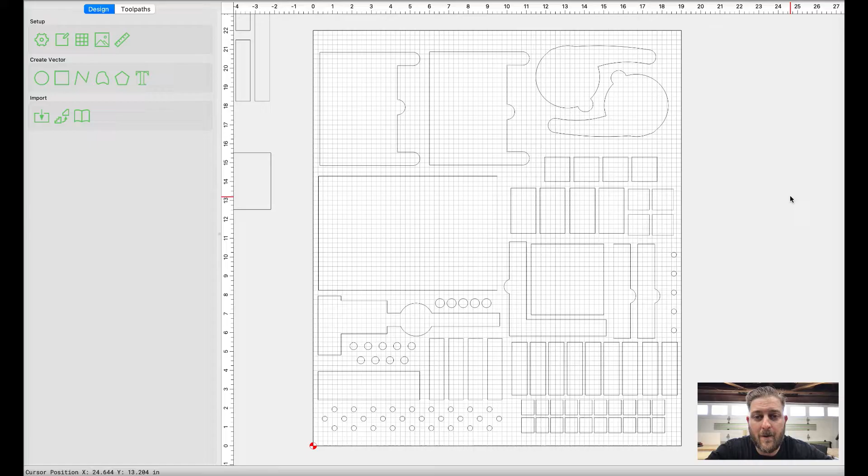Any softwood is going to be good for a beginner because it's going to be really easy on your bits. And if you have any crashes or make any mistakes, it's going to be a lot less likely to break a bit. So here in our example, this included file is going to have a sample tray that I've designed for my Husky tool cart to fit in one of the drawers, but this can be modified any way that you want. But let's go ahead and start with our first thing.

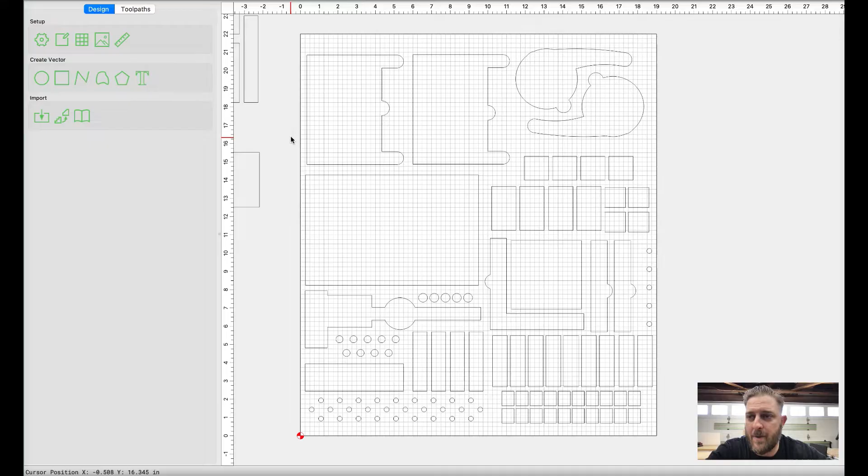It's this setup wheel here, our job setup. We're going to click on that and we're going to type in our stock size. In my case, I'm using a piece that's 19 inches by 22 inches. And I've measured its thickness with calipers, which is extremely important to do on every project. And it's about 0.62 inches in thickness.

We're going to make sure that our zero height is measuring from the top. And our toolpath 0 is set to the bottom left corner, the lower left. Our material, we're going to put softwood, the machine's Shapeoko 5 Pro. And retract height, I've changed to 0.2 inches. Usually this comes stock at 0.5. It's a good idea to keep it at 0.5 of an inch when you're first starting out.

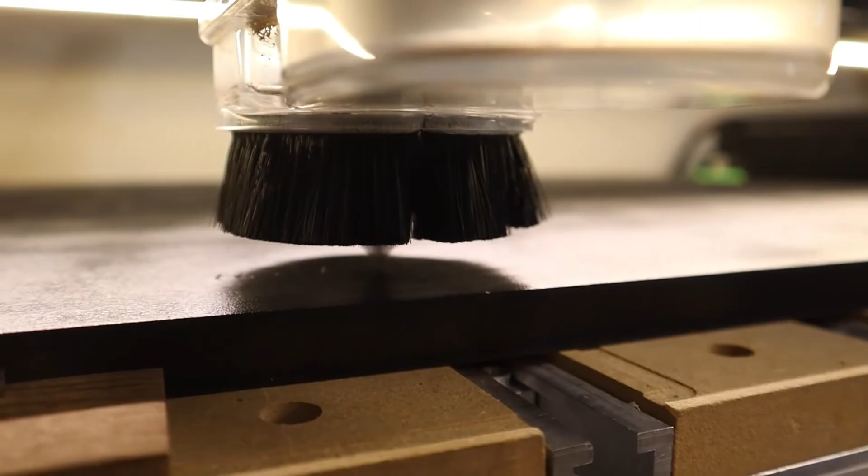That's going to tell the machine how far up to raise the bit as it's moving to its rapid positions throughout the workspace. So the higher it is, the less likely you're going to crash into something. So we'll leave it at 0.5. As you get more experience, you could lower this down to like 0.2. And that's going to save you a little bit of machining time because that rapid movement is going to take less time to accomplish. But we'll just leave it at 0.5 for right now. Okay, so our job is set up.

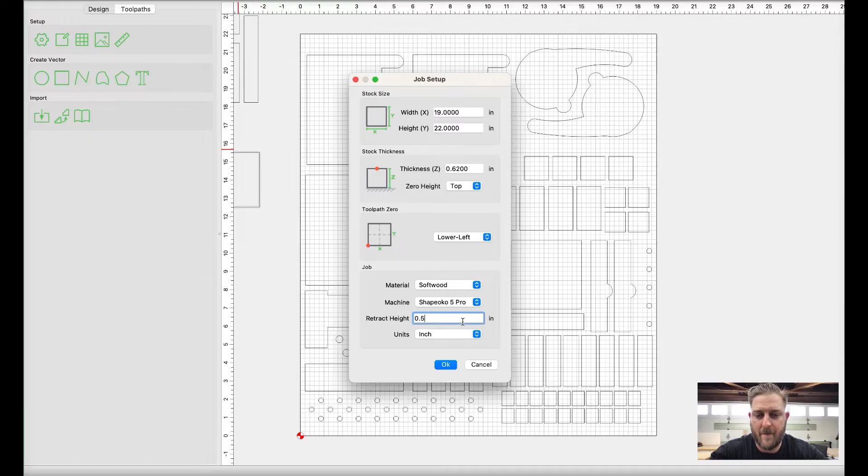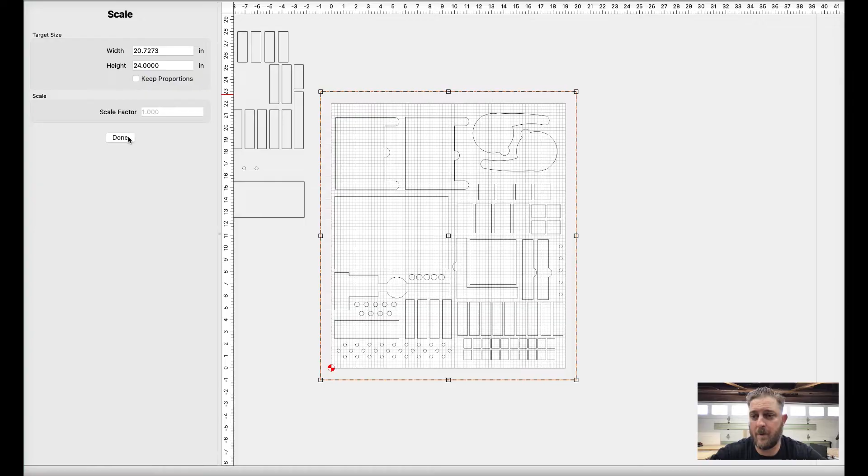You'll notice in this file, I have a perimeter square and then all the other small areas for various parts. Now again, like I said, you could easily modify this. If you want to change this to whatever dimension you can, not only in the job setup file, but in this transform file. I mean, you can make this thing 24 by 24 if you want, and you can move these around anywhere that you want. It's totally up to you to do what you want with this file.

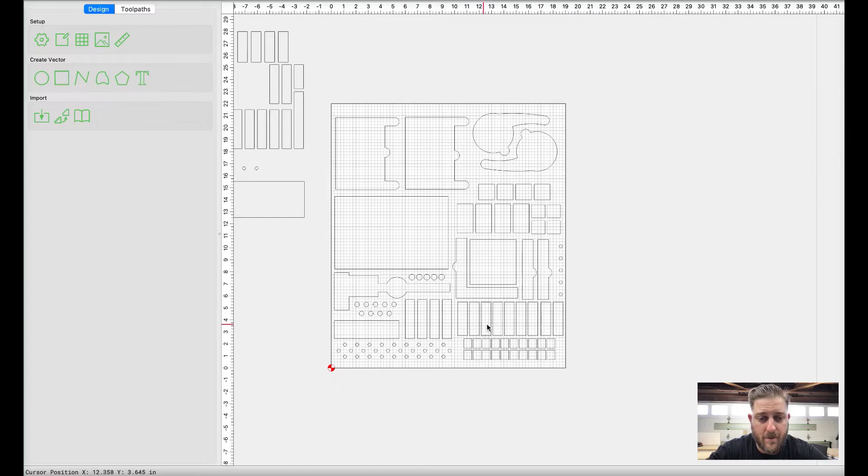In my case, this is a pretty good setup. I have room for bits down here for the T-nuts, small trays, large tray, calipers, caliper batteries, extra bits, clamps, squares, different clamps up here, and some other hold downs and cam clamps up here. So let's go ahead and make the toolpaths. Go up to the toolpath tab here. The toolpaths that we're going to use on this project are really simple. It's actually only one. It's going to be pockets.

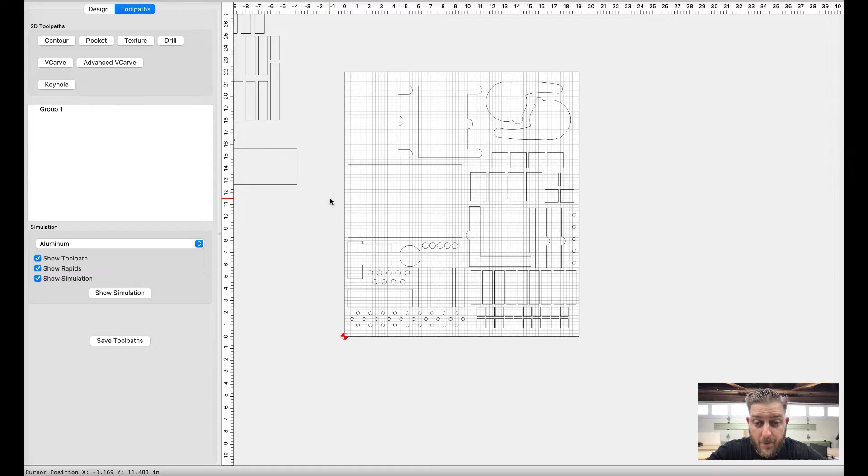Okay, so we're going to take material out of these, in between these lines here to create a pocket, which is going to make a space for us to hold our items. The only other toolpath I guess we're going to use is a drilling toolpath, and that's going to be to make these 1/4 inch holes right here. So we're going to be doing a pocket toolpath for most of this and a drill toolpath for just a small portion of it. The first thing we're going to do is create our pocket toolpath.

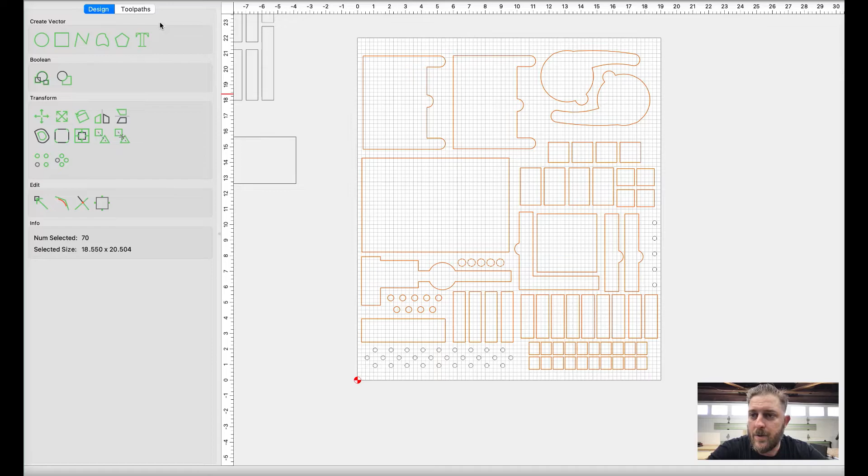So I'm going to highlight everything and I'm going to hold down Shift and I am going to click on our 1/4 inch circles that we're going to be drilling. Everything else on this screen right now that I have highlighted is going to be pocketed. So I am going to go to the Toolpaths tab. I'm going to click on Pocket, use current selection, and I'm going to change my bit to a 1/4 inch. I'm going to the softwood selection in the tool library, and I'm going to use the 201 end mill, which is the end mill that comes with the Shapeoko.

So if you have this unit, you will have this bit, and it is a very common bit. The 1/4 inch end mill is one of the most common you're going to use. It's definitely a good idea to have a lot of those, 2 or 3 on hand at all times, upcut,

downcut. So for the step over, I'm just going to change this to 0.12 and depth per pass. Since I'm using MDF on my machine, I know I can go 1/8 of an inch, 0.125 per pass with this 1/4 inch end mill, and I'm going to leave the speeds and feeds the same as they recommend here for stock. These are really good, safe feed rates and plunge rates that Carbide 3D recommends in their tool library.

You can experiment with these. You can always increase them if you want. The nice thing about using Carbide Motion is that you're able to increase the speed while the machine is running. You can actually bump it up to 200%. So you can increase it on the fly when the machine's running. So if I'm at 75 feed rate right now, I can bump that up to 150 just on the controller as I'm running the job if I want to.

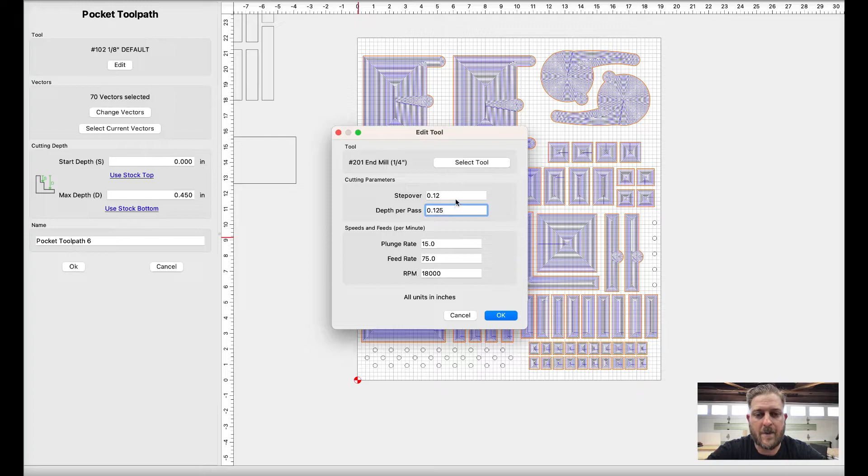So I'm going to leave that at 75, and I recommend if you're new to leave it at what Carbide 3D recommends, except for the step over and the depth per pass in this situation. Okay, so here is our tool path generated. The next thing I need to change is the start depth and max depth. So obviously the start depth is going to be the top of the stock, and the max depth on these, I'm just going to go down 0.2 inches, and I'm going to name these pocket tool path.

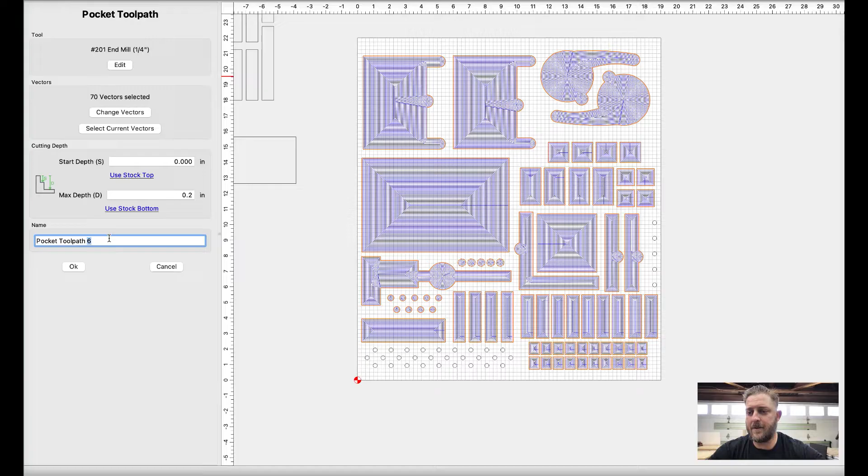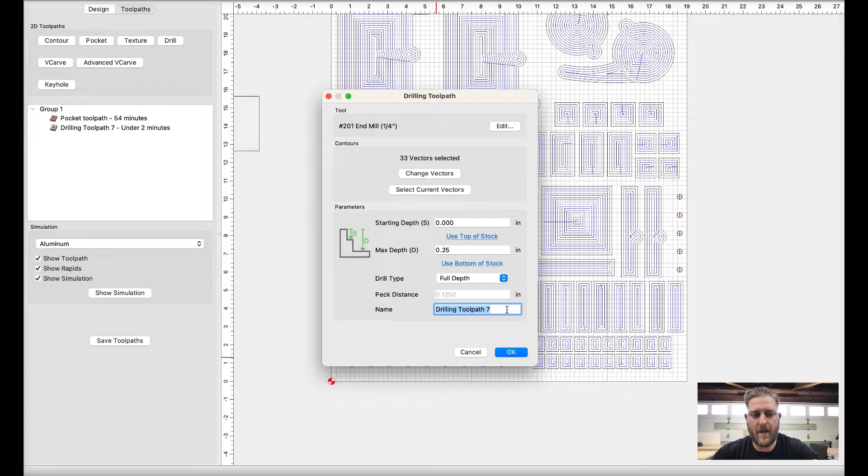Okay, so it's generated the tool path. It's given us an estimated time of 54 minutes right now. Next thing we're going to do is our drilling toolpath. So I'm going to highlight our circles here and click on drill, use current selection. I'm also going to use the 1/4 inch end mill, the 201 end mill for this. And I'm going to put these down to a depth of 0.25 inches. And I'm going to change the name to bit holders. Now we have all the tool paths assigned for this particular job.

Let's go ahead and simulate. I just unclicked show tool paths. That'll clean up some of the lines as you'll see on the simulation. But there we have it. You can jog around. You can angle this. Carbide Create really gives it a really nice simulation. So there you have it. So we're about 54 minutes for this job.

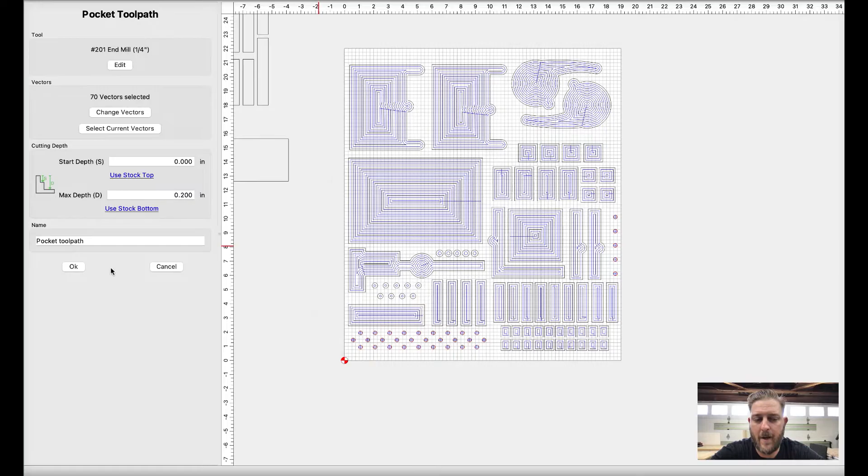If you want to experiment, you can get that time down a little bit. If you feel comfortable, just for example, if we switched this to about 100 inches per minute, and then on MDF with a 1/4 inch end mill, that is still fairly conservative. That's nothing crazy. It's going to get us down to 42 minutes. So let's stick with that. Okay, I'm going to save our tool path and send this over to the machine.

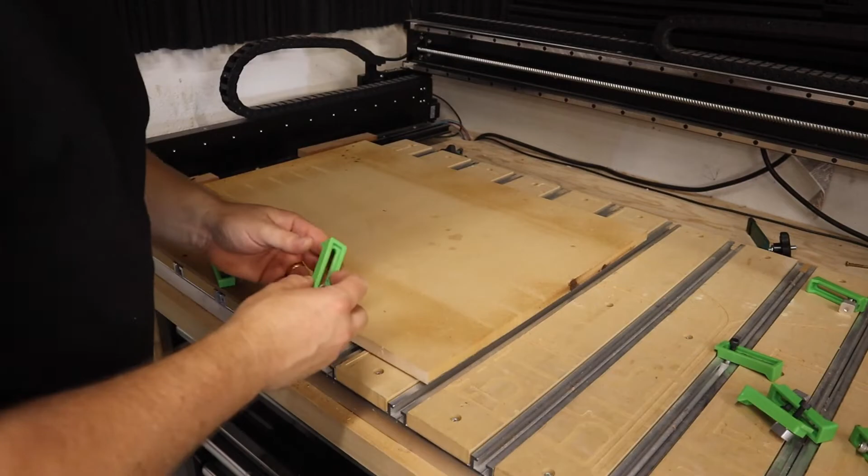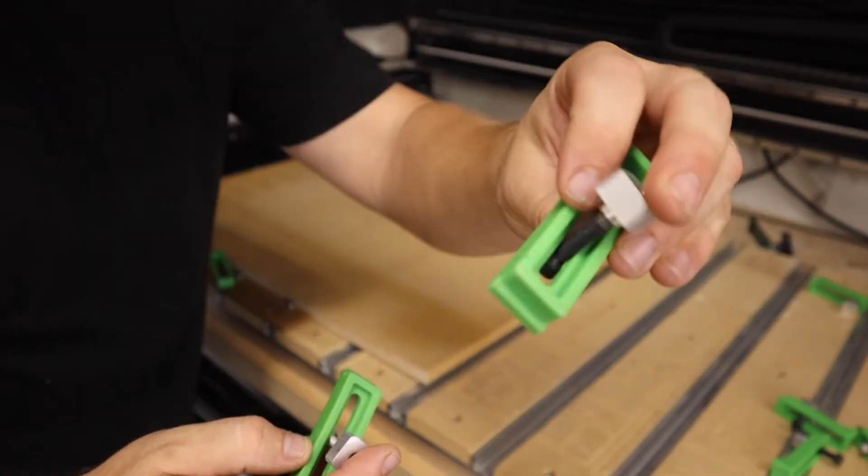Okay, so for my clamps, I'm going to be using just the T-nuts and clamps that come with the Shapeoko. And these are great because they're plastic, so if you do crash into them, like I have here, it just cuts right through them. No harm, no foul. So I'm just going to set these up in the hybrid table and go ahead and tighten them down. For these ones here on the front of the table, I like to put a little piece of scrap wood underneath it, just so I'm able to tighten this down. And then I'm going to put about 3 or so additional clamps on here.

So aside from making sure that you have flat and milled stock all ready to go before you put it on the CNC, one thing you can do to make sure it's flat is after you clamp it down, you could take a straight edge and just run it on the board and make sure it doesn't rock or that there's any low spots. And this board was a little warped just because it's been laying around the shop for a while, but once I clamped it down, it's nice and flat now.

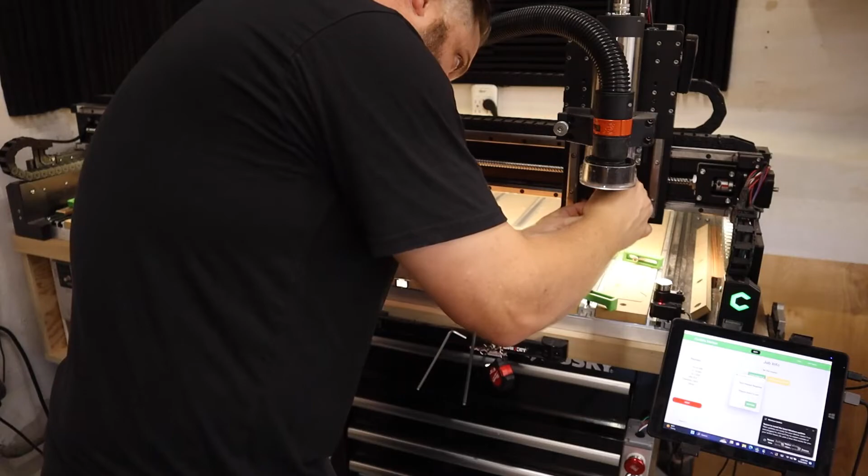As you get a little bit more experience, something that you can do is surface the entire piece on the CNC with a surfacing bit, or prior to putting it on the CNC, you can make sure it's milled with traditional woodworking tools like a jointer and planer. So here you can see the bit setter measuring the tool.

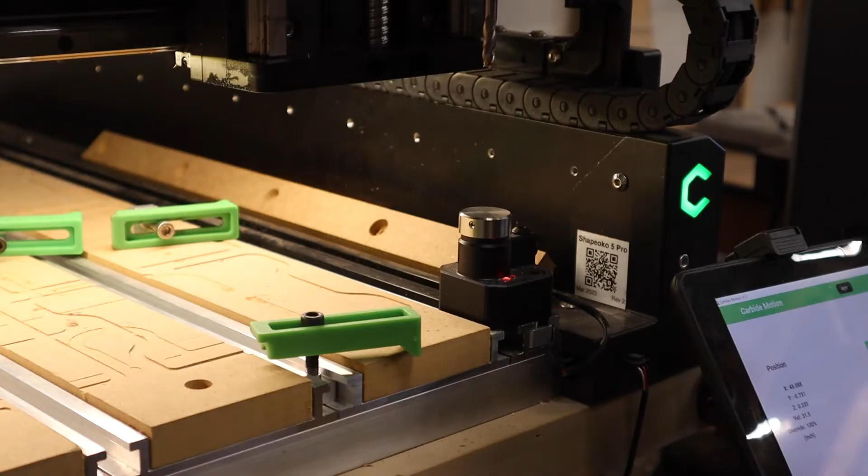So now we have the machine initialized and we have our material secured to the spoil board. The next thing we need to do is to set our 0 point for the machine. So I have a probe that does that with this unit. It's the BitZero by Shapeoko, or by Carbide 3D, but I'm not going to use it in this situation just in case you don't have one. I'm going to show you how to do it manually.

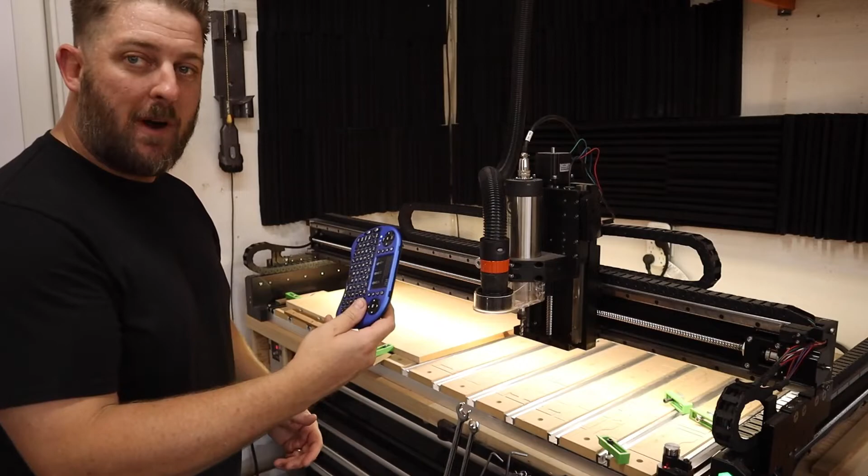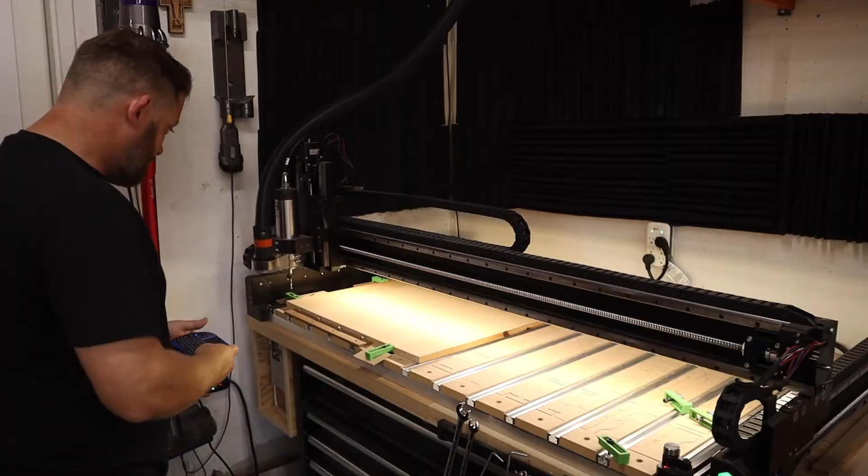It's still very easy. So what I'm going to do is I'm going to use my wireless controller here, and I'm just going to jog the machine over to the X and Y 0 point that I want to set. So all I'm doing here is eyeballing the center of the bit with the bottom left corner of the material. And once I have everything where I want it, I'm going to lock that in on Carbide Motion by setting 0 on the X and the Y. I'm going to hold off on the Z. We're going to take care of that right now.

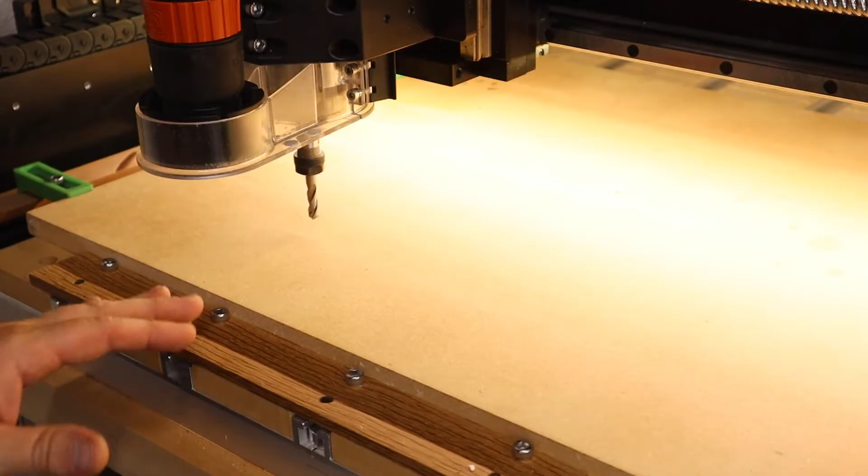So I like to jog the bit somewhere towards the center of the work area, and I'm going to go ahead and just manually lower the Z-axis down until I'm just touching the material. And one thing you could do is put a piece of paper under here. That's going to give you a little bit of clearance, and you're going to lower the bit just till the paper drags on the bit. But in this circumstance, it doesn't have to be that critical. So I'm just going to run this down. I'm going to kind of spin the bit until it just starts trimming a little bit off, and right there is where I'm going to set it.

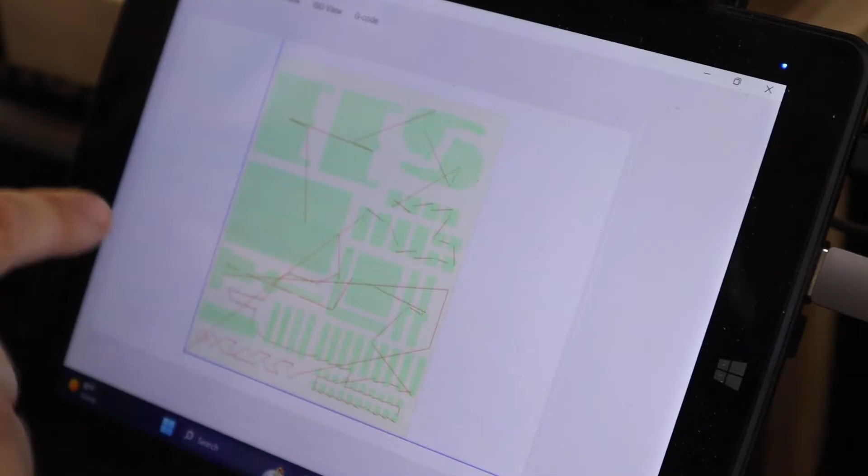Okay, now we have everything zeroed. The machine knows where it is in the space. We're going to go ahead and click on Run and load our file. And this will bring up a quick overview of what we're doing. You can also see a preview, top view, front view, and isometric view. That all looks good. Hit done, and we can start the job.

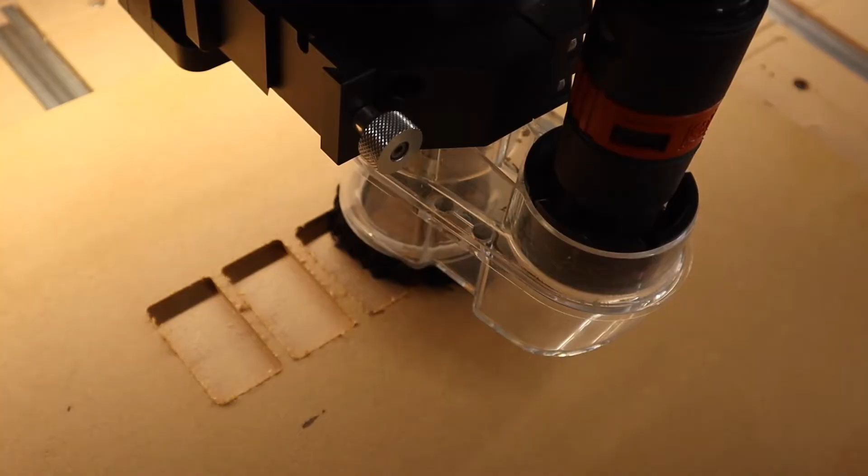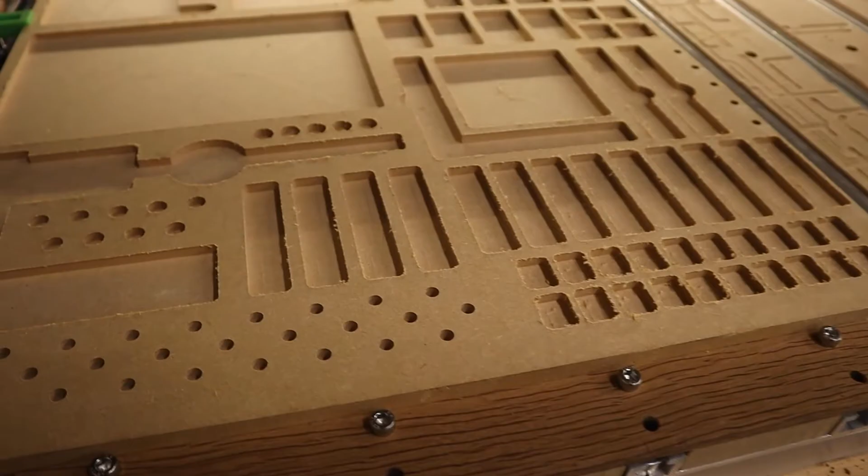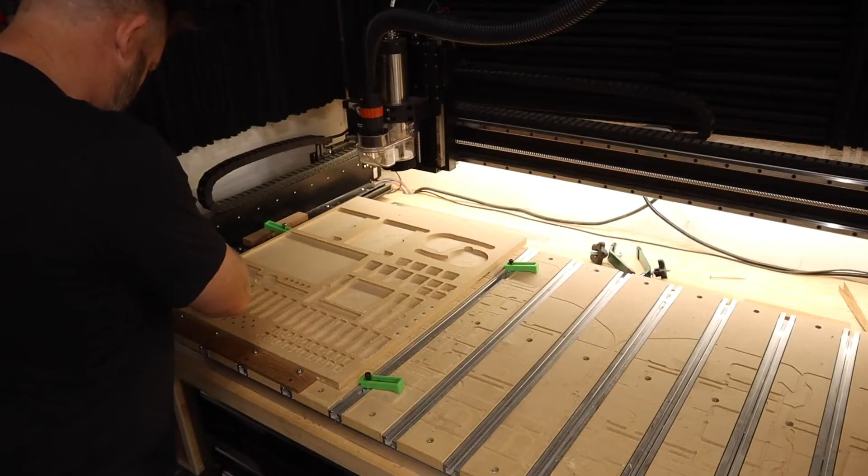Okay, so we got our file cut. Our tray's looking pretty good. You can notice that because I'm using an upcut end mill, it is ejecting the chips upwards, which is good. It helps us cut fast and it creates a clean bottom, but it makes the top a little bit fuzzy. So what we're gonna have to do is sand the top of this just real quick to get rid of those fuzzies, but other than that, we're almost done. So here's our completed tool tray. Let's go ahead and get this in the drawer and load it up.

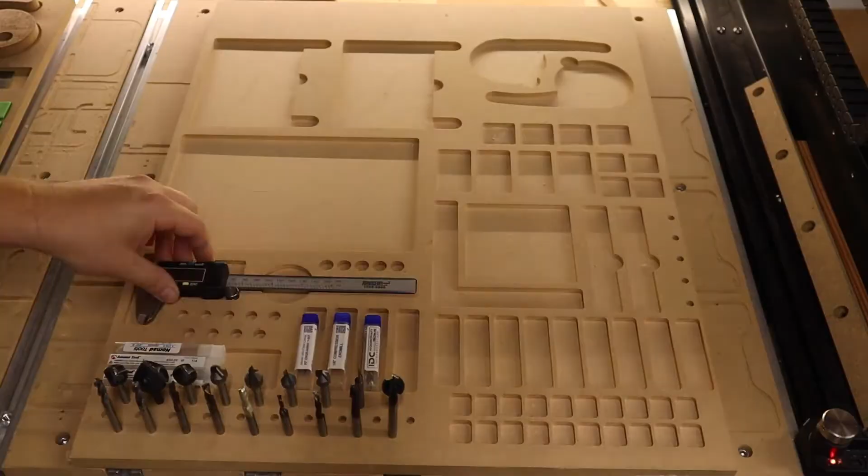Okay, so there you have it, our first beginner CNC project, the tool accessory tray. This is just an awesome first project for so many reasons. It's cheap, it's easy to build, it's forgiving, and most of all, it's really useful because when you're first starting out, you need a place to put all this stuff. And maybe you won't have all this stuff when you first start out, but you will have a lot of it, and you're gonna continue to grow. So this is a project that's gonna grow with you.

Another thing I'll say about this is, even when you're experienced with CNCs, you will make mistakes. On my file, I didn't make these pockets quite big enough for my cam clamps here, or these clamps here either, but even if you make a mistake on it, it's still usable. I'm still going to use this. It's fine. I'm going to change it in the file so it'll be good for you if you decide to download this. But it just goes to show that no matter how much experience you have, it's okay to make mistakes and it's still really usable. So don't be afraid to try this.

Okay, so for our next project, I've got a 3/4 inch sheet of MDF back on the CNC. This time I've spray painted it black, and we are going to make an American flag. And this is just a really awesome beginner CNC project because they look so cool. You can sell them. They go like hotcakes. Even though there's a ton of people making them, there's a lot of different variations you can do with them. So there's always something new and exciting that you can make, or you can change to them to really make them cool. So I highly recommend this as a second CNC project.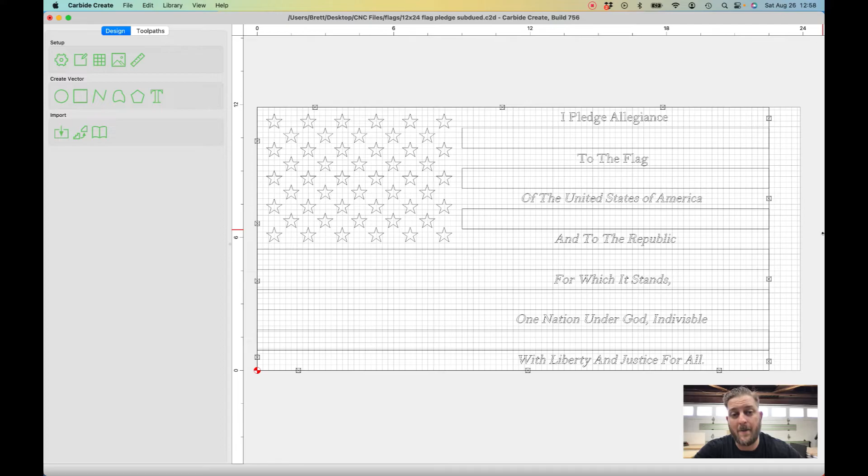All right, so whenever we start a new project, we want to always start with our job setup. So for this project, we're going to be using a piece of MDF, which I painted black, and it is 24 inches wide and 39 inches tall. Our thickness is at 0.67 inches. Again, we're zeroing from the top, and our toolpath 0 is going to be the lower left, and all these settings are going to remain stock.

One thing I want to say about the stock size, in this example, I'm going to show you how to make this flag by cutting it out of a larger piece of stock. I think that's easier sometimes when you're starting out because you're able to put clamps around the whole perimeter of the project to make sure it's all held down nicely. You could use an exact size piece of material, so like a 22.5 by 12 inch piece for this flag.

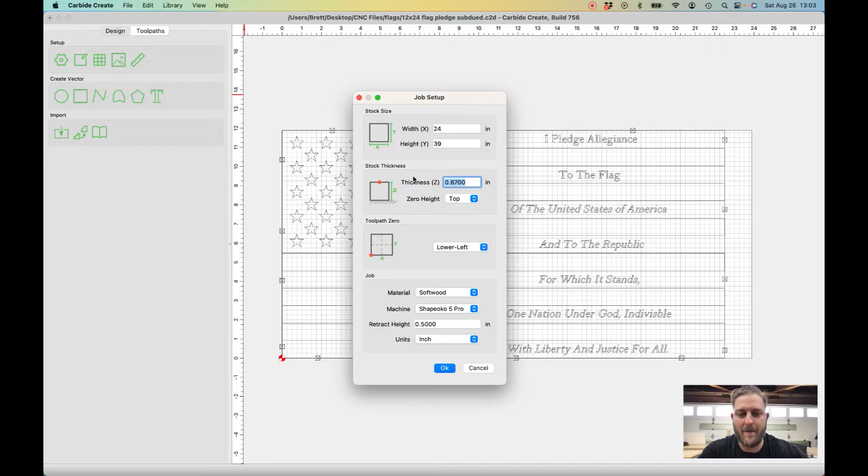But you wouldn't be able to use clamps around the perimeter in some of the areas unless you set them perfectly, because some of the toolpaths are going to run into them. So I like to have a larger piece of material just to start out. I recommend that. So that way you don't worry about any bits crashing into any of your clamps or anything like that. That'll make more sense later when I show you this actually running.

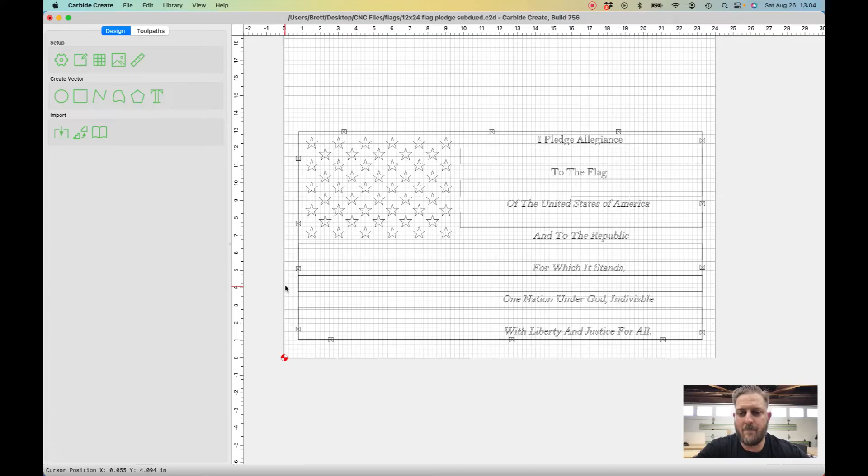So you can see this is our large piece of MDF here, and then this is our actual project. So I'm going to highlight this whole piece, and I'm going to move it just up a little bit. Again, that way I have space on the left, the right, the bottom, and on the top also to clamp this down, and I don't need to worry about the end mill hitting any of the clamps.

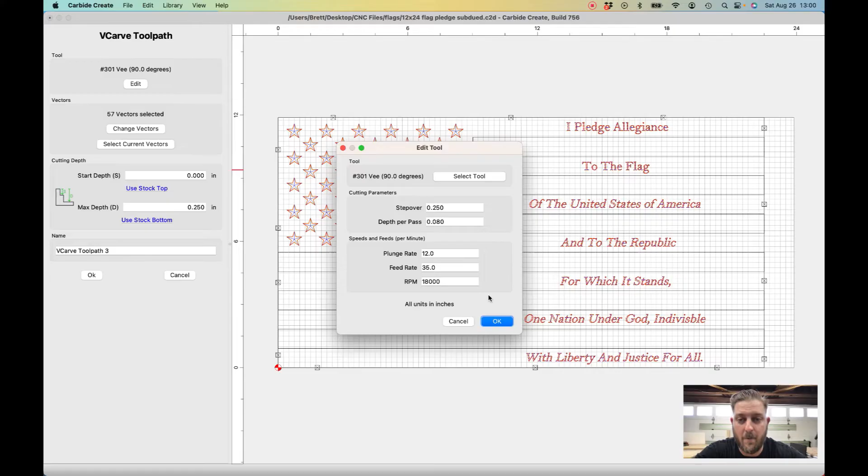Okay, the first toolpaths that we're going to assign are the stars and the words. We can group those together because they are both going to be a V-carve toolpath. For our tool, it was already selected. We're going to use the number 301 90-degree V. I like the way this looks for the stars and for writing, and we're going to leave all these settings the same. This is just the stock softwood parameters. Again, these are very conservative. You can definitely up these if you like, but we're just going to stick with the conservative stock settings in this example.

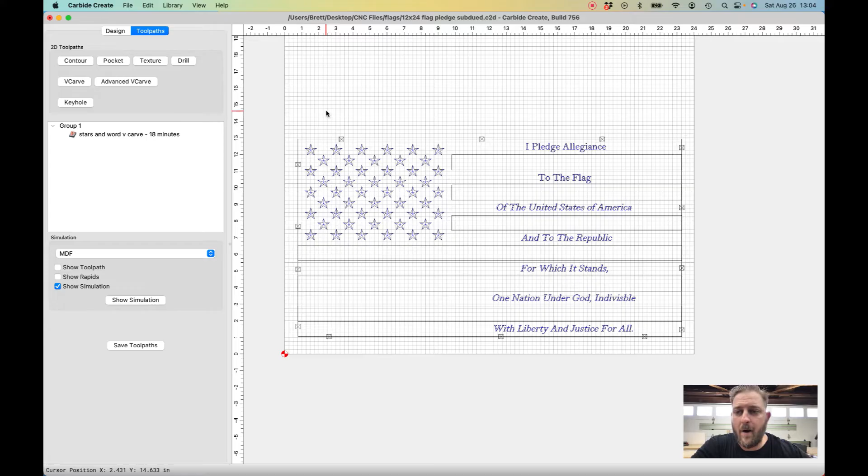The starting depth is going to be the top as always, but whenever you're V-carving, you want the total depth to be the bottom of the stock. In our case, our material is 0.67 inches, so I'm going to put 0.67. So now that we have our V-carve toolpath set up, let's go ahead and set up the pocket.

So now I'm going to hold down Shift and left click on all of these rectangles, and I'm going to click on the pocket toolpath, use current selection. My end mill again is going to be a 201 1/4 inch end mill. That's already selected. Start depth is the top of the stock. Max depth on this is going to be 0.1 inches, and I'm going to change this name to stripes.

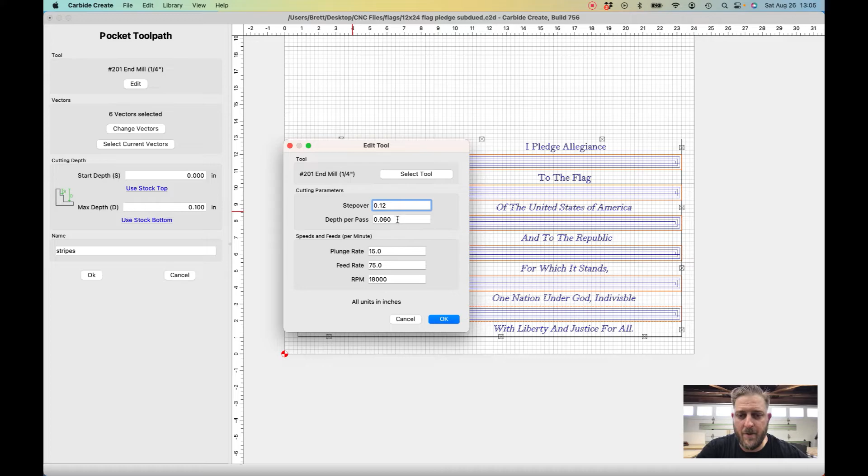If you want to go back and edit your toolpaths at any time, all you need to do is go onto the left menu here and double click on whichever toolpath you want to change. And I'm going to edit my 1/4 inch end mill here to have a step over of 0.12 inches, and I'm going to change my depth per pass to 1/8 inch. Again, those are still pretty conservative settings when using MDF or a softwood, and that's going to take my time down significantly.

Okay, so now we've got a V-carve, we've got our stripes pocketed. Last thing we need to do is select the outside perimeter, and we are going to do a contour cut. That is going to cut all the way through all of this material. 1/4 inch end mill, 0.125 depth per pass, plunge and feed rate, RPMs are going to stay the same. But for the depth here, I'm going to use the stock bottom, which is 0.67 inches, and I'm just going to change this to 0.675. I'm going to go a little bit lower than the stock just to make sure I cut through.

Okay, the next setting that's really important is your offset direction. This is going to tell the tool where to cut on this line. Right now it's set to inside, left of the line.

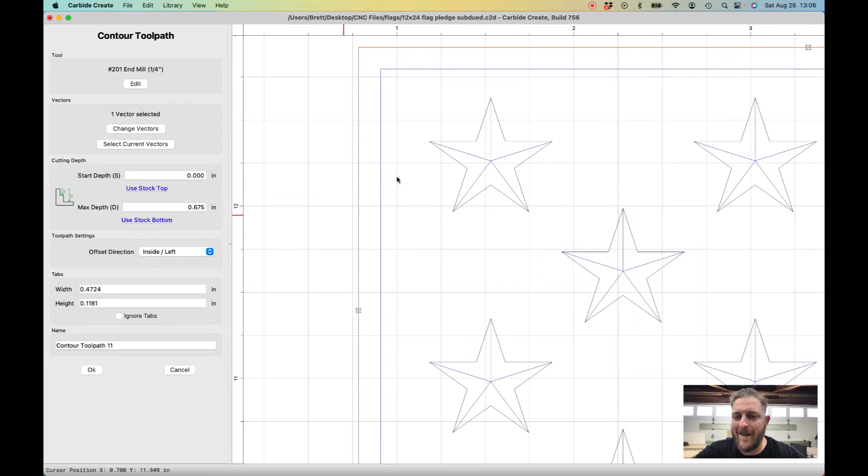So this is actually going to make our square, if we had it set like this, our rectangle would be smaller than what I drew on the file by a 1/4 inch, by the size of the end mill. And we don't want that. So we're going to go ahead and switch this to outside right. And you'll see that changes the toolpath from the inside to the outside. Now we're cutting this rectangle out exactly the same size that I had it drawn in the file.

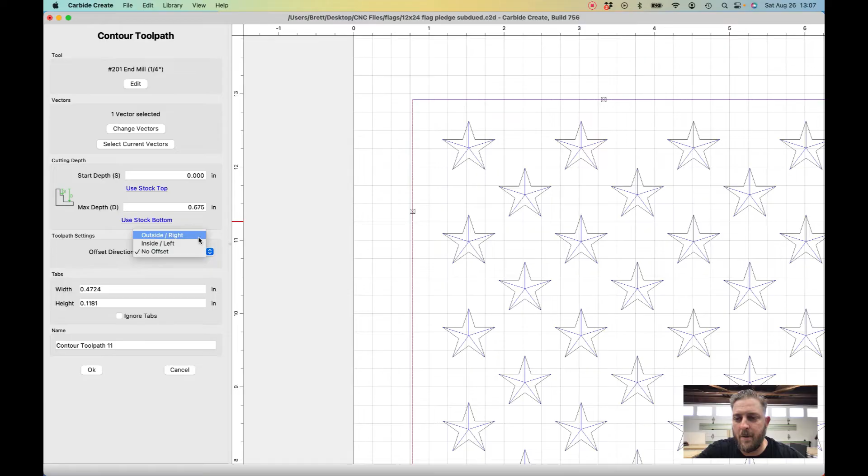You can also switch this to no offset, and that will cut right on the line. That's useful for some circumstances, but in this case we want to go outside right. And you'll see I have these squares with an X on them around the perimeter of the file, and those are tabs. Those are areas that my contour cut is not going to cut. It's going to leave a small amount of material there so that this piece, our main flag, will not float in the middle of our stock when it cuts all the way through. This will hold it in place.

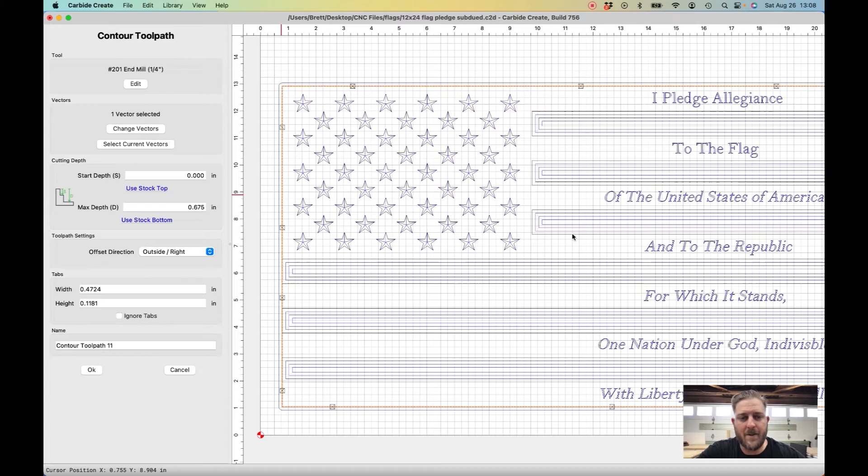And that's really important, because if you do not secure your workpiece and you cut all the way through it, it's going to move and bounce around and get all messed up. So if you're not securing this some other way, like with double-sided tape or CA glue and blue tape, you definitely want to use tabs. And to start out, I would highly recommend them. Over here in the tab field, you can actually set the parameters for what size you want the tabs. I just leave that stock for the most part.

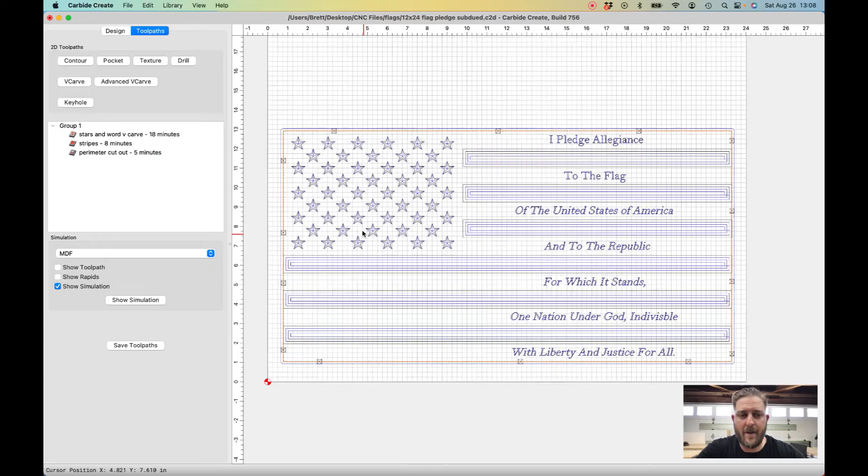Okay, there we have it. We have all of our toolpaths assigned: our V-carving, our stripe pockets, and our perimeter cutout. Remember, if you ever want to reorder these toolpaths, all you have to do is left click them and drag them, and you can put these in any order that you want. But in this case, I do like having it in this setting. I'm going to start with the 90-degree V-bit to carve out the stars and the words. And then I'm going to pocket out my stripes.

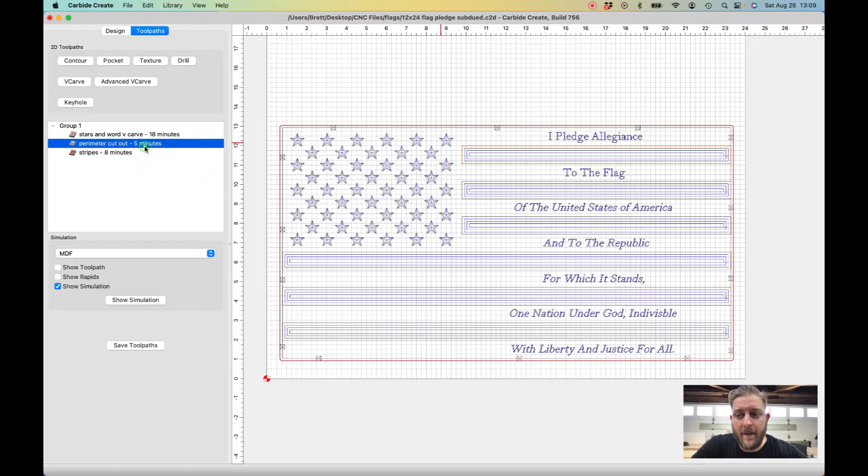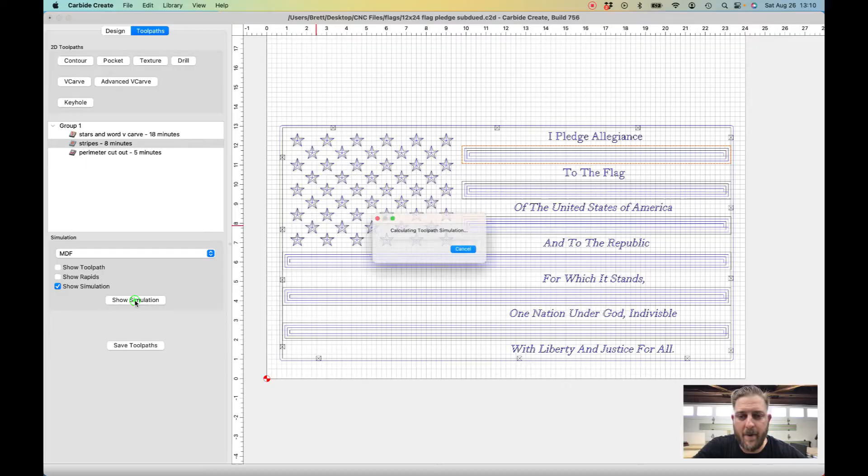I don't want to put my perimeter cutout next necessarily, because if I did that, I would have only these tabs supporting the workpiece. Ideally, you want to have the most amount of support for your workpiece when you're doing this much of a pocket operation. So I'm going to change my perimeter cutout to the very last thing that we do. That way, this contour will not be cut, and it'll be supported fully by the clamps, and everything will be nice and sound. We'll go ahead and look at the simulation. And there we have it. You can see what those tabs look like in this simulation.

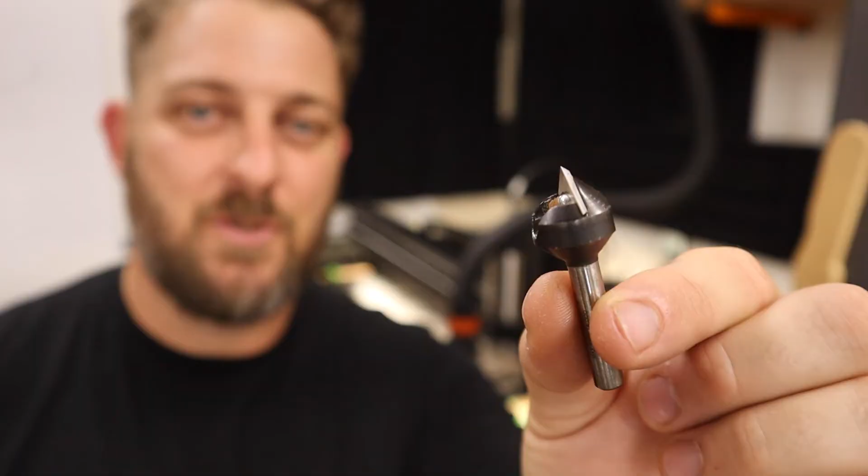All right, let's go ahead and send this to the machine. I'm going to use a 90-degree V-bit for this toolpath. Let's get it loaded up in the spindle and get it started. So here's a quick tip when you're engraving stars. It's really important that you have your zero height set perfectly, and that your material is flat. If it's not, your stars will come out different sizes when you engrave them over the union space. So I've double checked and triple checked my zero height where the union's going to be, and I've put my ruler on this portion of the MDF and made sure it was flat by applying a little extra clamping force.

That's just a little trick to make sure that even though you might have slightly warped material like pine or MDF. In this case, the MDF I'm using is scrap, so it's been leaning up against the wall for many months, and it's a little bowed. So those are some quick tricks you can do to help flatten out your board to make sure your stars are nice and crisp. Let's see how it turns out.

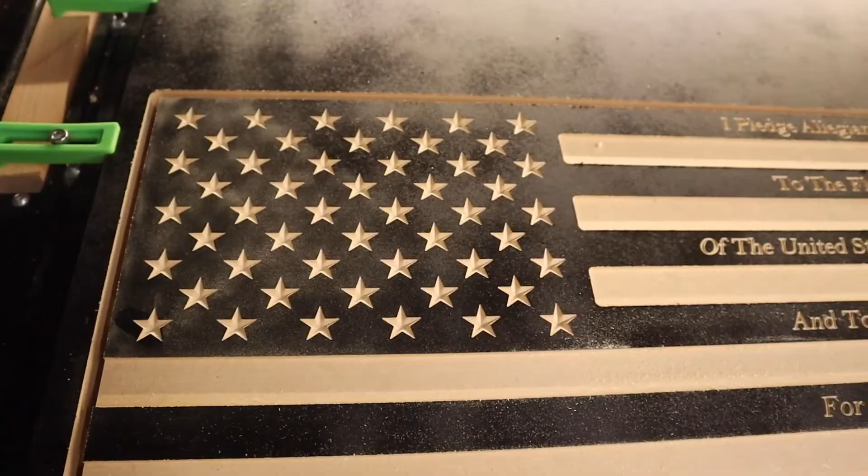One other tip I have is get yourself a sanding block. This is just a scrap piece of 3/4 material. I've glued a strip of 80 grit sandpaper on one side and 120 grit on the other. I'm going to use this to sand in between the stripes where I pocketed out, and also the chamfered edges of the flag, just to knock down any burrs. This is really easy to use, especially on MDF because it sands so easily. If you make a lot of flags, this is a nice little tool that I always keep right on the CNC because I use it all the time. All right, let's get this cleaned up and finished up.

And for project number 3 on my list of my top CNC projects for beginners is going to be a valet tray. Now, a valet tray is simply a pocketed tray that you can put on your nightstand or by your front door to throw your keys and wallet into when you're not using them, and so you always know where they are. Very popular.

These are all over the place, but I think it's a great project, again, because it's simple, it's useful, everyone likes them. You can give these as gifts, you can try to sell them, you can do so much with them, and they're so simple to make. Now, we're also going to be building upon the skills we've learned with the past 2 videos by adding a new tool path to this project. And it's not even really a new tool path, it's just a different use for one.

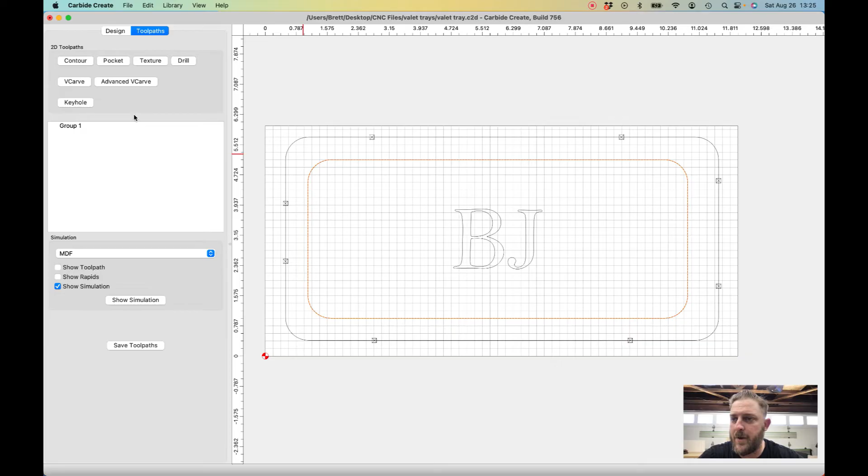So we're going to select the vector, go to pocket. We're going to use our 1/4 inch end mill. We're going to edit the settings though. We're going to do again step over of 0.12, and our depth per pass is going to be again 1/8 of an inch. This is poplar that I'm using, so it is still a pretty soft wood. This end mill will blast right through it. The other settings I'm going to leave the same, just like the other projects. Feel free to change those if you want though. Okay, our start depth is going to be 0. Our max depth on this is going to be

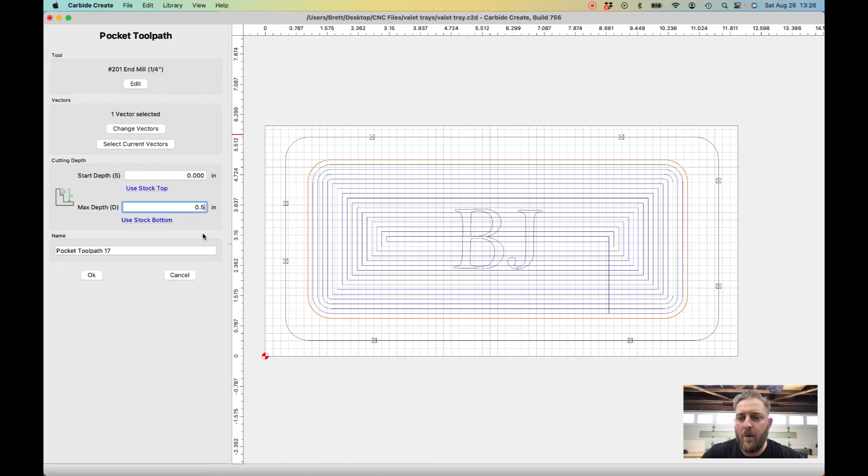0.51 inches. Now, the reason I did 0.51 inches is because I'm using a 1/4 inch end mill that's going to be going down 1/8 of an inch per pass. So if I were to do 0.5 inches, this would take 4 passes for the tool to get to the final depth. But I want to go ahead and do a final 5th pass, which is more of like a finishing pass, and it's only going to cut off 0.01 of an inch. That's the reason why I'm doing this at 0.51 inches. It's just one little trick that you can do to help create this a little smoother.

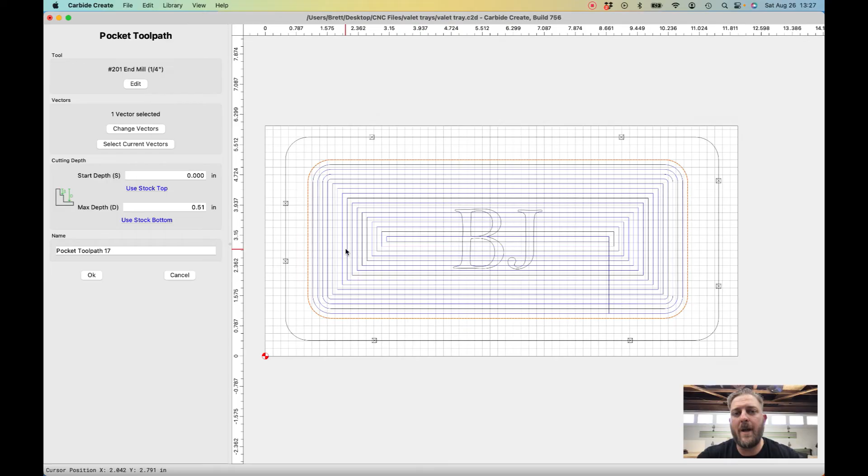You can also create a separate toolpath for a finishing pass and change the step over to make it overlap as it cuts each time more, and that'll help remove some of these mill marks that you'll see when we actually cut this out. But this is just a beginner way to do it, and it gives a pretty clean cut. Let me just show you what happens if we go to edit and we change this step over to maybe, let's say 0.075. You'll see what this does to the simulation here.

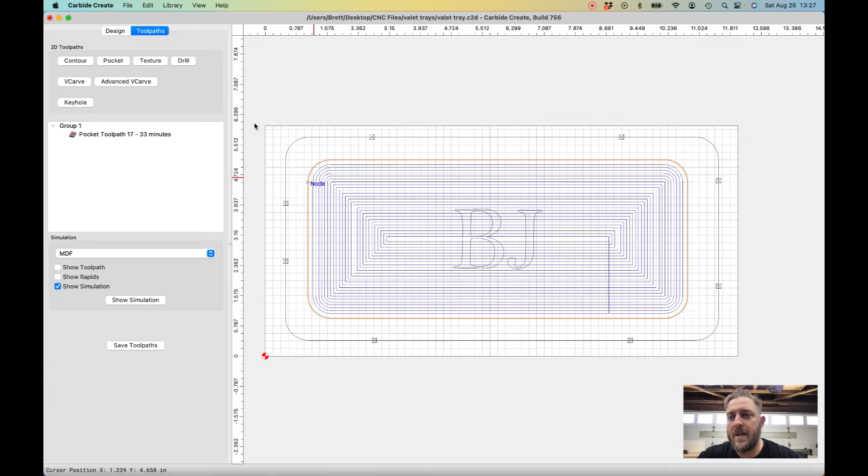It's going to tighten up these lines, so that means it's going to take longer because the bit is overlapping as it's going around in a circle a lot tighter. But that's going to give you a smoother cut. It's just going to take more time. In this case, I don't think it's necessary. I'm going to change that back to 0.12. That's a pretty good step over in my opinion for most operations, especially basic operations. So we'll leave it that way.

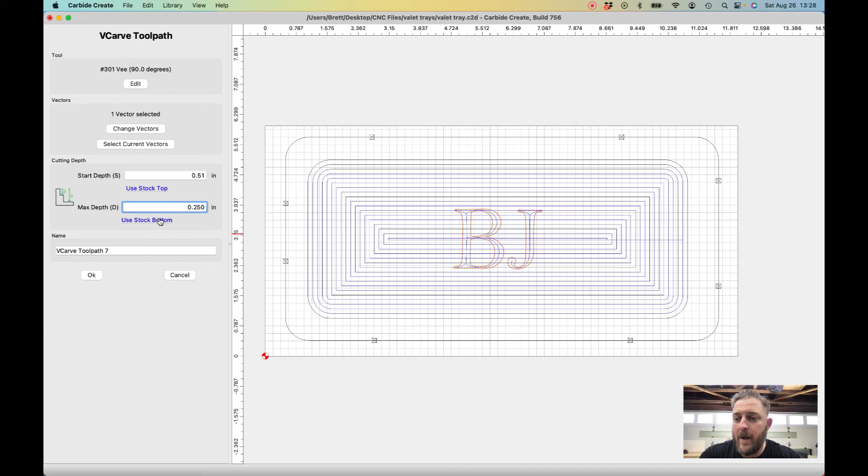Next thing we're going to do is we're going to engrave our initials. So that's going to be a V carve. So we'll select our vector. Our tool is again a 90-degree V-bit. The only difference here is our start depth. It's not going to be 0 because we're pocketing out this section here, so it's going to be lower. So this start depth needs to be 0.51 inches. That's the depth that we're making our pocket. So start depth is going to be 0.51, and our max depth is just going to be the stock bottom. And that's going to give us a nice V carve on here.

Now I'm going to do our perimeter cut. This is going to be a contour. I'm going to use the 1/4 inch end mill. We'll change these parameters again to 0.12 depth per pass. Everything else is going to be the same.

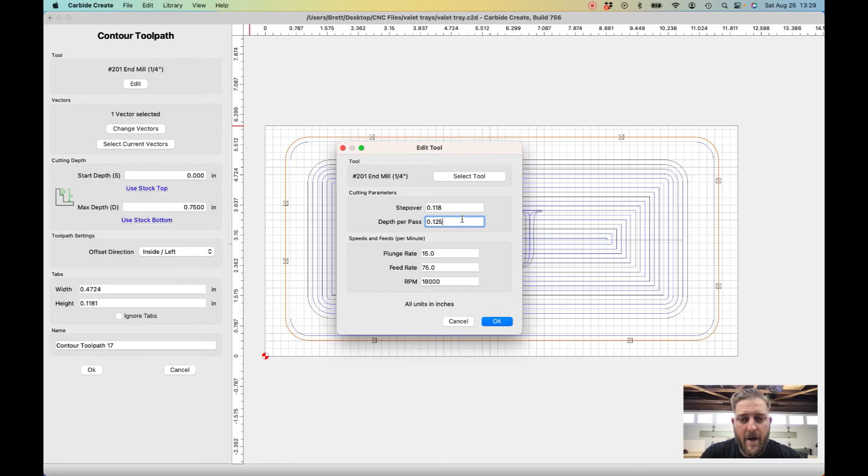We're going to change this only to 0.125 per pass, 1/8 of an inch per pass. Our start depth is 0. Our max depth is going to be 0.755. I just want to go just a hair lower. Now, when you use this file, you're going to have to change this to whatever stock size that you're using. So make sure you get a set of digital calipers on it to measure what the thickness is. And our offset direction is going to be, again, outside to the right.

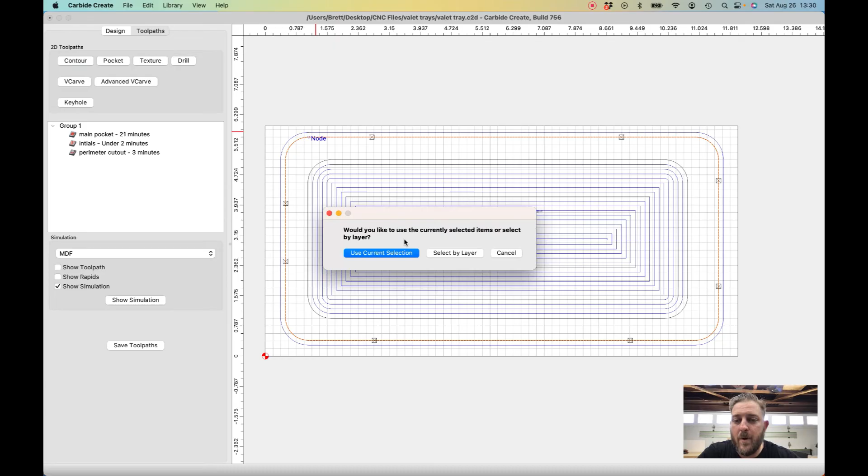Okay, now the new toolpath we're going to use for this job is we're going to create a second contour on our perimeter outline, but we're going to use a 90-degree V-bit, and we're going to leave all this stock. And what this is going to do is create a chamfer on the outside of the cut and on the inside pocket. So I only want to go to a max depth of 0.1, and I'm going to change this offset direction to no offset. So it's going to cut right on this line.

Now, when I set this up, I only selected this outside vector. What I want to do is also select this vector, the inside line and the outside line. I'm going to go ahead and click on both of these, change vectors to selected. There we go. So now I have both of them, 2 vectors selected, the outside and the inside. No offset, and I'm going to change this to chamfer.

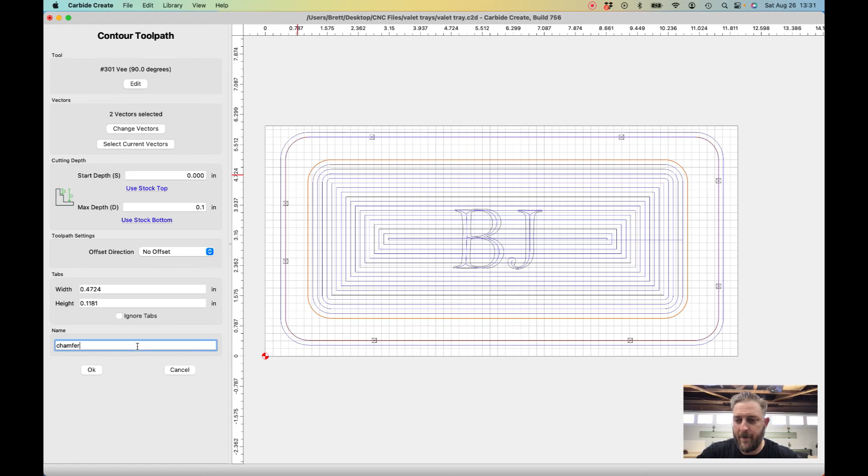Okay, so we're going to cut out our main pocket. We're going to engrave our initials. We're going to do a perimeter cutout with tabs, and then we're going to chamfer the outside perimeter and the inside pocket line. Let's see what this looks like on the simulation. Looks pretty good. You can see our inside and outside chamfers.

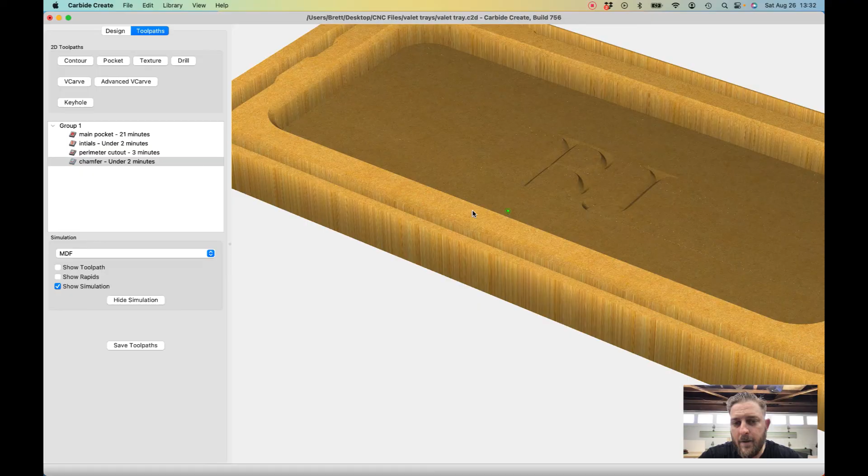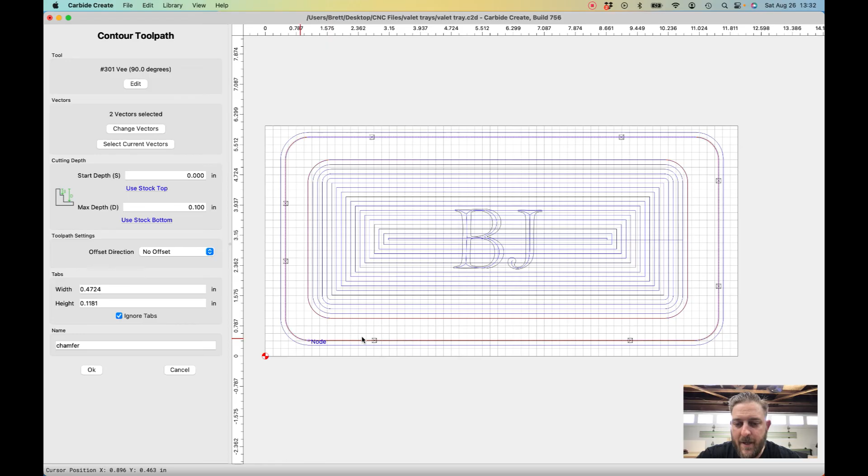Oh, one thing I forgot. You can see on our chamfers, it is showing the tabs here. So let's go back. Let's hide the simulation. Click back on our chamfer toolpath. We need to make sure we click this button here, ignore tabs. If you don't click this button, it's going to raise the bit once it gets to these tabs and won't look right. So we want the tabs for our perimeter cutout, but we don't need them here for the chamfer.

So we're going to ignore those, and I'll show you how that simulation changes here. And there we have it. Our tabs have been ignored for the perimeter chamfer. All right, let's go get this on the machine.

I am using 1¼ poplar for this. You can use anything you want. This file is set up to be used with stock as thin as 3/4 of an inch. All you have to do is make sure when you're setting up the file, you go to your job settings and you make sure you input your material thickness, if you're going to be using Carbide Create like I have set up.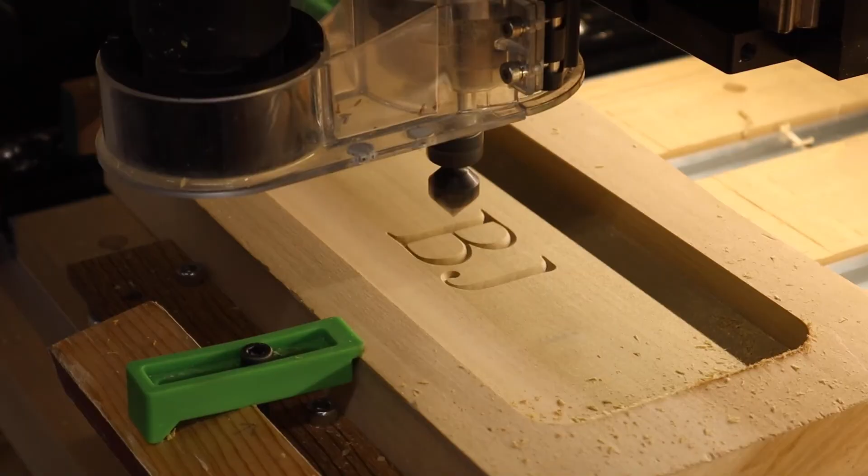All right, we have the 90-degree V-bit installed. I'm gonna leave the dust boot off on this toolpath just so you can see how it's cutting, and plus my vacuum's full right now anyway, so it's not really doing much. I had to bring in some reinforcements earlier during that perimeter cutout to take care of some of the dust, but I'll empty that out later and we'll change it up. This is our last toolpath of the day. Check it out.

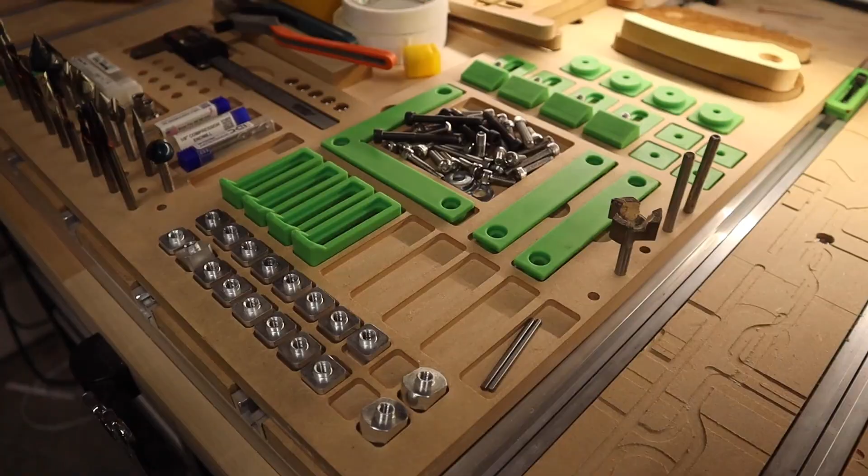Okay, so there you have it. There are my top 3 CNC projects for new users. Today we made a tool and accessory tray for all of our parts and pieces of our new CNC. We also created a cool American flag with the Pledge of Allegiance. And we made a simple valet tray to keep all of our stuff when we get home from work.